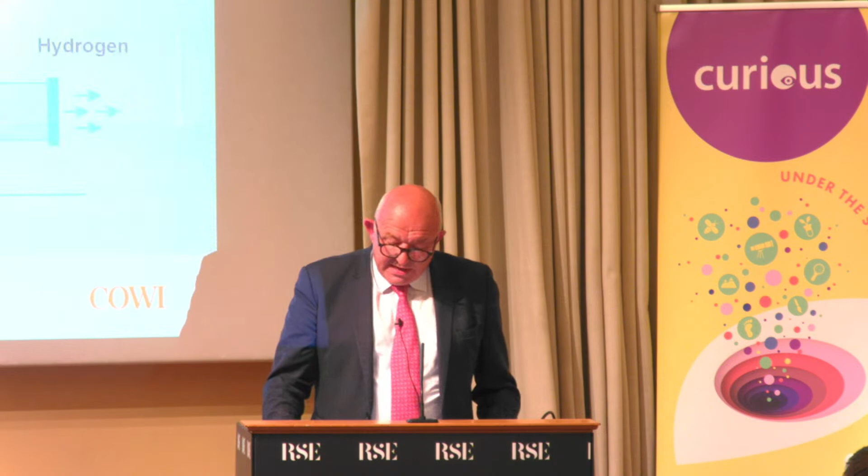There are many technologies at play here, and I'm just going to concentrate on a couple that our business is involved in — I'm not going to cover the whole gamut. The time is right to tap into hydrogen's potential to play a key role in energy storage. This technology is emerging as one of the leading options for storing energy from renewables.

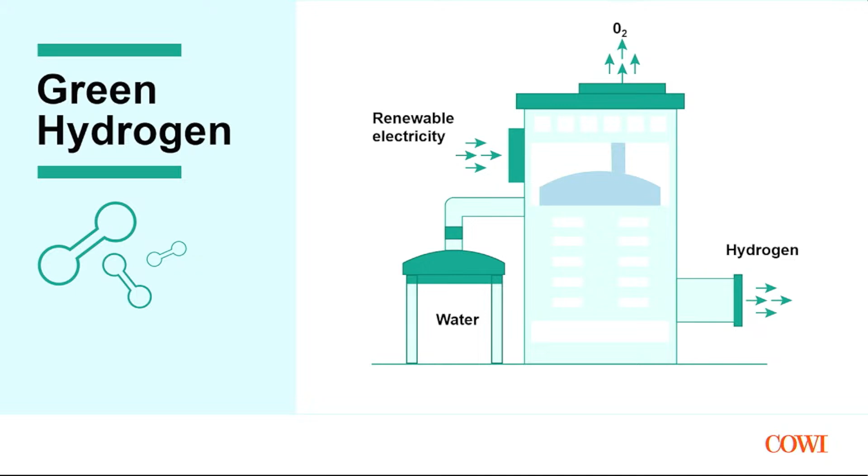The main issue for me is that we're quite quickly falling behind our neighbours, particularly Denmark and Germany. Green hydrogen is made by electrolysing water, splitting the water molecule into oxygen and hydrogen, critically using renewable energy. That's green hydrogen, as opposed to blue hydrogen, which is derived from methane with associated carbon capture. You'll hear much talk in the UK about low carbon hydrogen.

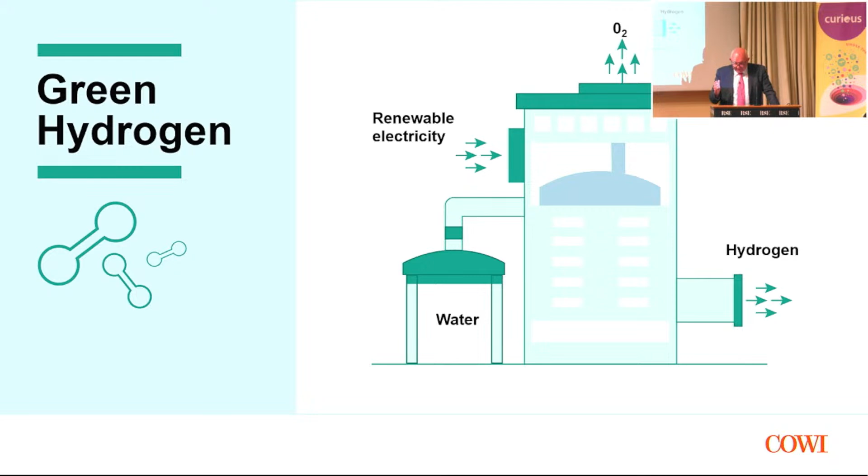That is hydrogen, green hydrogen and blue hydrogen. But blue hydrogen is not pure renewable sourced. Hydrogen production aspirations in Scotland published by the government are to reach 5 gigawatts capacity by 2030, a substantial amount, increasing to 25 gigawatts by 2045. And this is not just green, it's green and blue. So when you hear these numbers, remember to challenge them. The aspiration of the Scottish Government is to become a net exporter of green hydrogen, actually the electrolyzed hydrogen.

Scotland is in a great position to develop and exploit the potential for green hydrogen. We've got plentiful wind opportunities. We've got plentiful fresh water, because lots of countries where they're talking about green hydrogen, North Africa etc., they are limited by the availability of fresh water, where we're over-endowed with the stuff.

The RSE's position on the consultation with the Scottish Government was that both governments should focus on green hydrogen, but accept that blue hydrogen, in terms of we've got a lot of natural gas, should be considered as a bridge to a green hydrogen future. And that's really given us time to get the electrolysis scaled up to the size that we would want it. So green hydrogen has a role in mitigating the curtailment costs that I talked about, but its real benefit is much wider.

In fact, it featured in a number of the main initiatives that came out of COP26 in Glasgow. Green hydrogen-based fuels such as ammonia, green methanol and green ethanol store renewable energy and allow us to use that energy at a later point in time. It can be transported over long distances from regions of abundant energy like Scotland to energy-hungry areas, perhaps thousands of kilometres away. So it's a very versatile fuel.

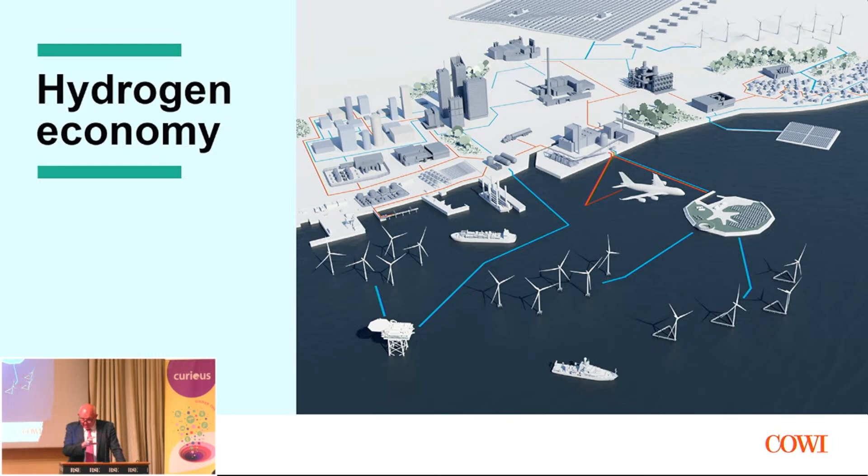The potential interconnectivity of a hydrogen economy is shown on this cartoon, with renewable energy sourced from wind connected to various off-takers through electrolysis into society. The process of reaching a hydrogen economy will be achieved to a large part by a process called sector coupling. And this sector coupling attaches and attracts energy producers to energy users in terms of hubs, and that is using hydrogen locally.

In effect, these sectors are coupled via green hydrogen and green fuels. And by coupling these different sectors of the economy, we have the opportunity to start looking at decarbonising hard-to-abate areas in society, and that is things like shipping, heating, heavy transportation.

As an example of just the rate of change in this space and the investment that is now being poured into it, just what is being achieved and maybe how far Scotland is behind. The port of Esbjerg in Denmark is its largest port, annual cargo of 4.3 million tonnes, 6,000 ships, so it's a substantial port. There was a meeting there with the President of the European Commission, the Chancellor of Germany, and Prime Ministers of Belgium, Denmark, Holland. They all signed a joint declaration to look collectively at what energy could be produced from wind around their coastlines and feed it through the port of Esbjerg, focusing that as a hub. So they pledged to expand the renewable energy there by some tenfold in terms of offshore wind.

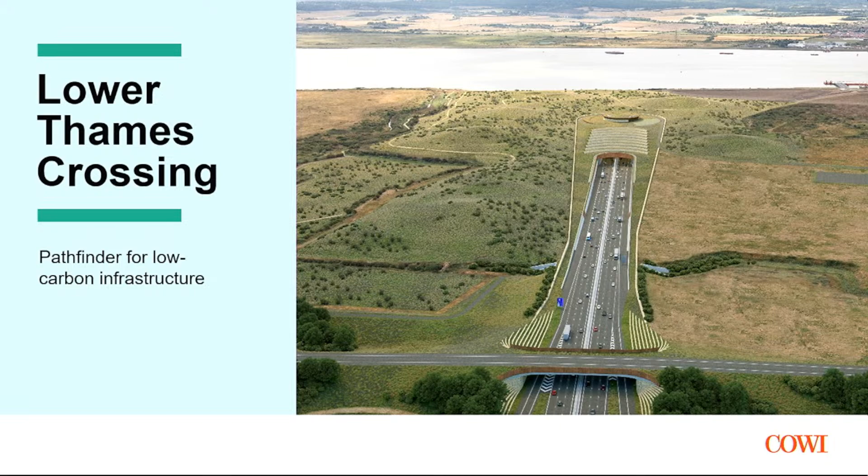Another area closer to home, a project that's very close to my heart, is the Lower Thames Crossing. It's new highway construction in the Thames. The civil engineering sector is very hard to abate, to try and get the carbon out, but energy storage can help. LTC is a brand new road hoped to connect Essex and Kent underneath the Thames estuary, hoped to be completed by 2029. It will have the UK's longest road tunnels, using the third largest tunnel boring machines in the world, the largest we've ever had in the UK, 2.6 miles of tunnel, 14 miles of road, 50 bridges. So lots of concrete, lots of digging, lots of carbon.

But what National Highways have done here is quite unique. They benchmarked the amount of carbon that was going to be produced from this project, and they are actively going through the procurement process now, and will incentivise the contracting entities who come to build it with real money to drive the carbon down. So they are creating a market now, in terms of green fuel development along the Thames estuary, to decarbonise this piece of infrastructure. This is a real pathfinder project within the UK, and I certainly think that in Scotland we should be looking at this sort of approach to decarbonise our infrastructure. Some real lessons to be learned.

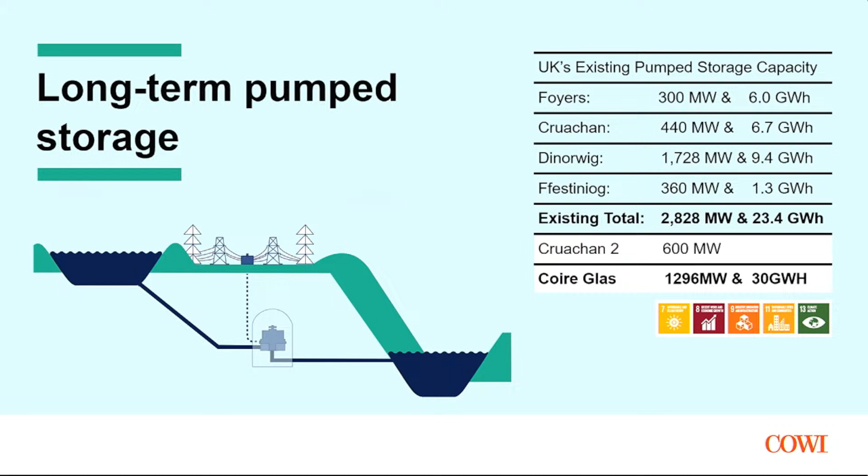The draft strategy acknowledges the potential for hydroelectric pump storage, long-term pump storage, to play a significantly greater role in our transition, providing flexible security and resilience to our energy systems. It's a very efficient system, and it's proven.

So how does pump storage work? There are two bodies of water. In times of low energy demand, when we have a surplus of energy or energy prices are low, you pump water up to an upper reservoir. In times when we need energy, the water goes through turbines, creating hydroelectricity, which is fed back into the grid. So in effect, it's a large battery, a highly efficient way of storing electricity.

There are two schemes in Scotland progressing at real pace. There's Scottish and Southern Energy's Coire Glas pumped storage hydro project, which is set to double the UK's storage capacity when it opens, and it's progressing well through its development. You're probably also aware of the Cruachan power station on the west coast. Well, Drax, the owner of Cruachan, is moving at pace with Cruachan 2, another pump storage scheme beside Cruachan 1. So there's a big movement for pump storage in Scotland.

This is tempered by policymakers, and this is the UK government, who have been put under pressure, quite rightly so, because the people who want to release this investment and spend on these schemes are not through the final investment decision yet. It's all about the price that they can charge for storing electricity. So they're looking for a cap and a floor, a ceiling and a floor price on the energy that they can store for us and for society. I know the First Minister has written to the Prime Minister to urge him to come out with what these values are.

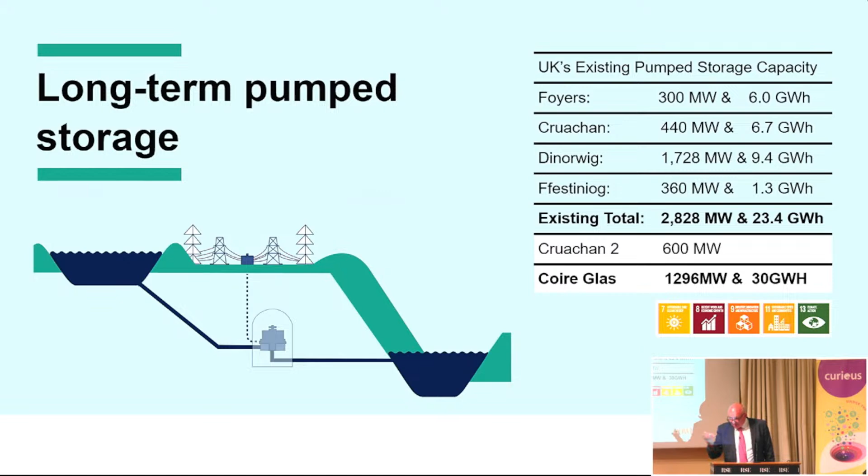Scotland has a very long history in hydroelectric power. As you drive around our country, you cannot fail to see the dramatic infrastructure that snakes around our glens, the power stations and the dams. The starting point for this development was after the First World War, which we won, but it was almost a Pyrrhic victory because Britain was in such a desperate state, it took a huge toll on the country. Lloyd George's government recognised that Britain's electricity system was backward.

It lagged way behind the US and Germany, where the production of electricity per head far exceeded that of Britain. The government then recognised that the transformation required to improve the economy, to improve jobs and the life of our countrymen really needed to increase electricity production. So engineering and scientific adjustment had to be made and made quickly, and it was essential for survival.

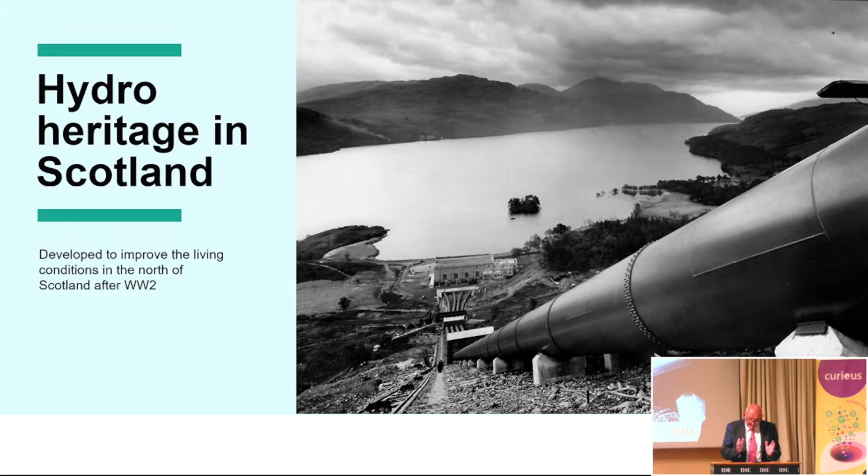This led, in fairly short order, to the development of the national grid, and by the time the Second World War came along, we had an operable national grid, and that became a vital part of the defence in World War II. But as we trundled through World War II, in 1942, Churchill set up a Council of State for Scotland.

This comprised the living Secretaries of State for Scotland, and charged them with considering the future of Scotland and rebuilding Scotland after the war. He said he would look favourably if any unanimous recommendation was made from these Secretaries of State.

In very short order, the committee established a subcommittee to look at the potential for hydroelectric development in Scotland, particularly the north, and they reported back very favourably. In 1943, the Hydroelectric Development Scotland Act led to the establishment of the North of Scotland Hydro-Electric Board, and that is the precursor to SSE today.

That was formed in August 1943, so they're celebrating 80 years of the Hydro Board last month. And if you go to the Scottish Storytelling Centre in Edinburgh, there's a wonderful display that opened today, all about the original paintings. It's well worth going.

So the scale of the investment - SSE's fleet of stuff built in just shortly after World War II: 78 power stations, 8,700 kilometres squared of catchment. That's 11% of Scotland feeds into hydro, and 1,150 megawatts of capacity.

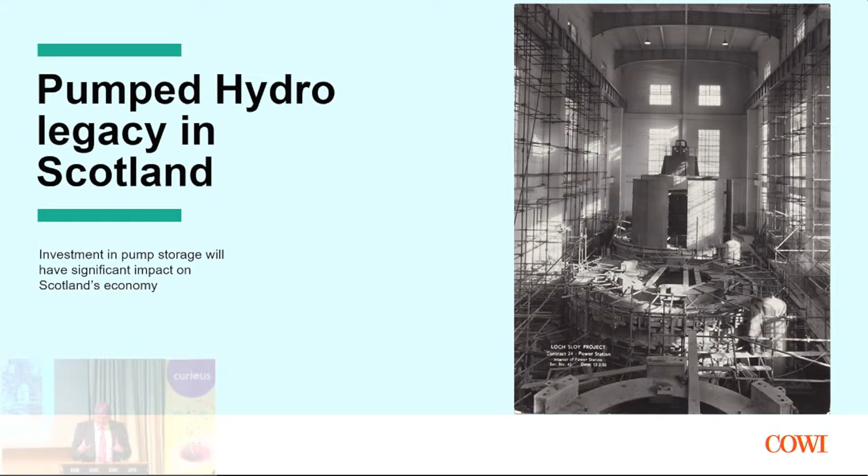And if I go back to my discussion on hydrogen, the potential for jobs in the green hydrogen area in Scotland - lots of those skills are linked to our skills in Aberdeen and the coastline there in terms of oil and gas. So saving those jobs, creating new jobs, coupled with pump storage development, the potential impact is significant indeed. In fact, I would go as far as to say truly transformational.

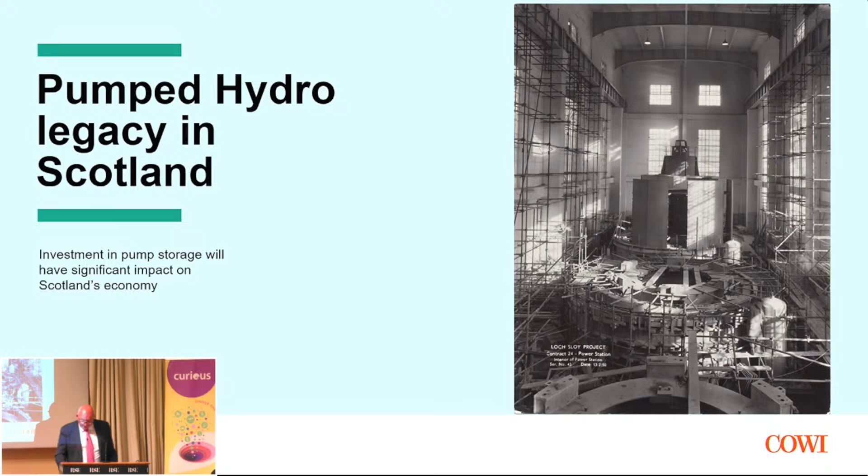Why this site? Well, there are two large bodies of water. There's Loch Lochy, and Loch Ness at the back. I'll show you Loch Lochy in a minute. There's a huge volume of water, and the ability to create a reservoir high on the hill with not a very long planned distance between the new reservoir and Loch Lochy.

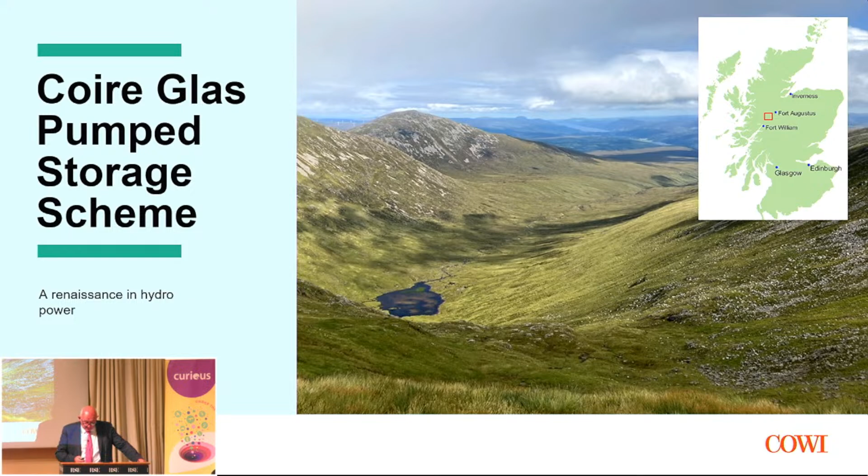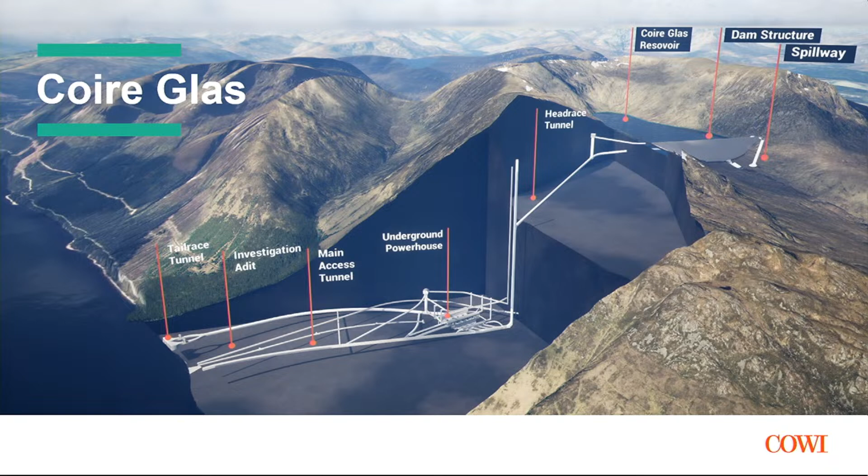That's in generation mode. When reversed, when you're pumping water to get up there, it comes in from the intake structure through the turbines, reversible pumps, up here and back up to fill this loch. The other bits and pieces of tunnel are an emergency access tunnel, ventilation tunnels, a ventilation shaft here - that's an extension - and that's a surge shaft.

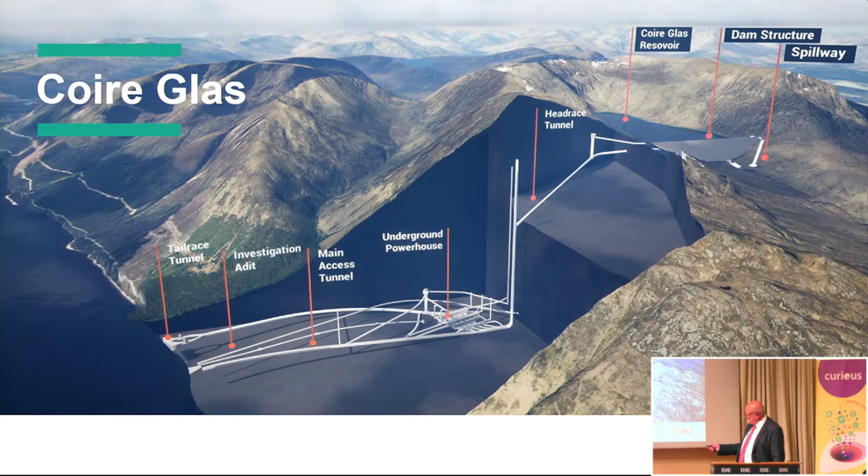So the scale of the underground development is monumental. To give you an idea, from there to there, it's a vertical head drop of 500 metres. The height of that shaft is akin to the Burj Khalifa tower in Dubai, the pointy tower. So the scale of the underground development is eye-watering - 2 kilometres of vertical shafts, 67 underground openings, all tied up will be 18 kilometres in length, and 4.6 million tonnes of rock will be excavated.

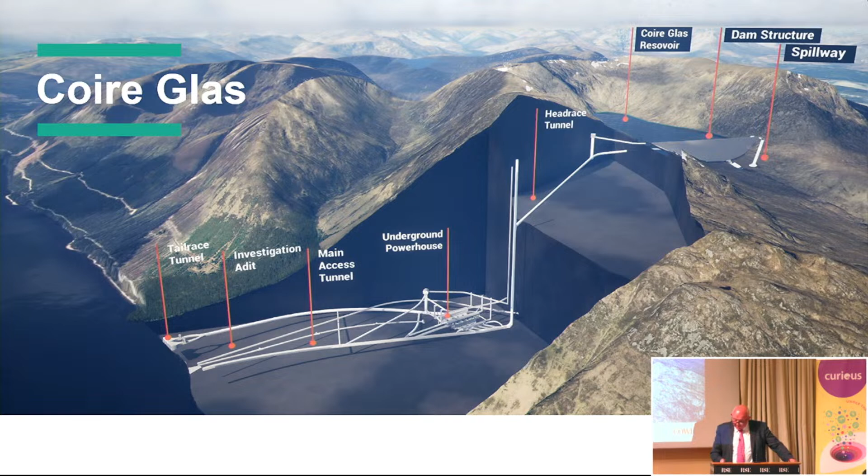So, truly gigantic undertaking. This is a closer look at the power station. Incidentally, this is not necessarily exactly what would be built - this is an early stage development. This is the bottom of the pressure shaft, you can see it's blue. The water comes down here or up there, goes through the power station complex and makes its way out through the tailrace. The caverns here are large enough to hold Glasgow Cathedral, and these tunnels around the top are for ventilation. This little hammerhead blind tunnel here is an exploration adit that is currently being constructed.

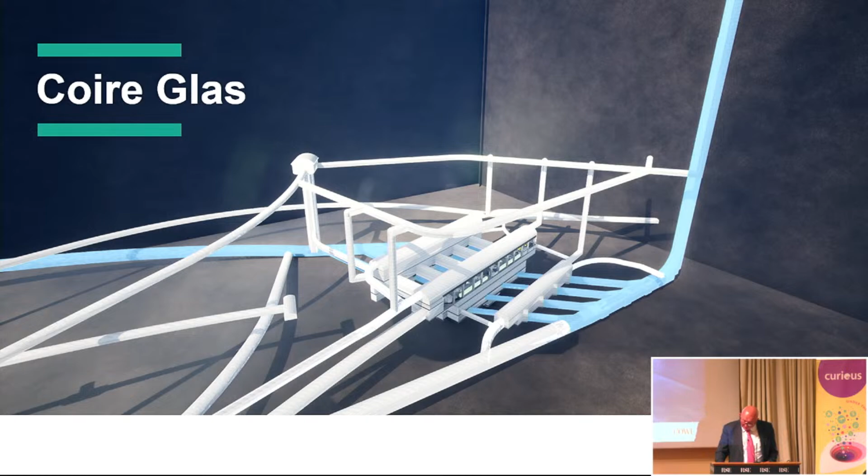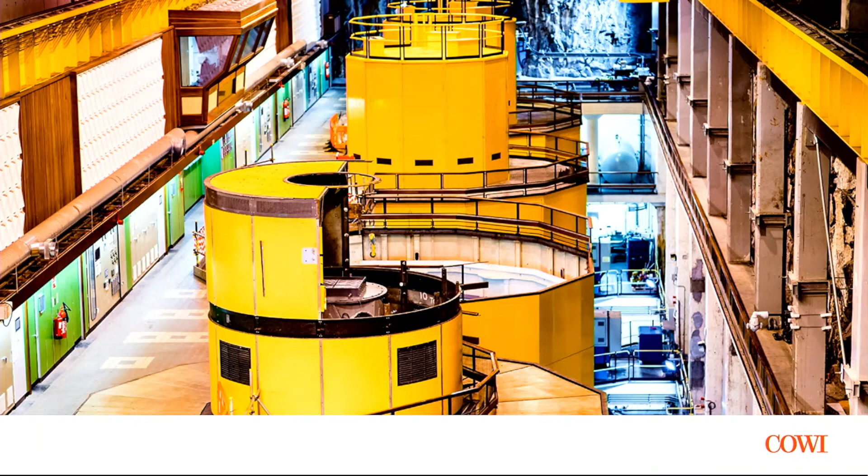So this is from Cruachan, just to give you an idea of what it looks like inside the power station. This is the turbine hall. You may have been to Cruachan - it's a big tourist attraction - just to show you the scale of the development that's coming.

And how do we build these things? Well, all of them will be built by a method called drill and blast. This is a high-speed railway, but it's the same technique that will be used. That's a drilling jumbo presented to the tunnel face. We drill holes in the tunnel face, charge them with explosives, fire the explosives, and go through a mining cycle of excavating the material and taking it to the surface.

As I said, there's 67 tunnels to be built at Coire Glas, and all of that waste rock will be used around the site - some in the dam and some in other parts of the site. As for the geology, the tunnel walls will be supported by sprayed concrete, and everything on the wet side, where there's water, there'll be a concrete lining.

In the cavern construction, the caverns are immense, so we take them out in slices. We go in at the top and take the top of the cavern out in 2 or 3 slices - small tunnels to form the cavern - and then we work down the sides of the whole cavern until we create the full opening. So it's a very sequential process. We just go in every day and do the same thing, getting faster and faster at it.

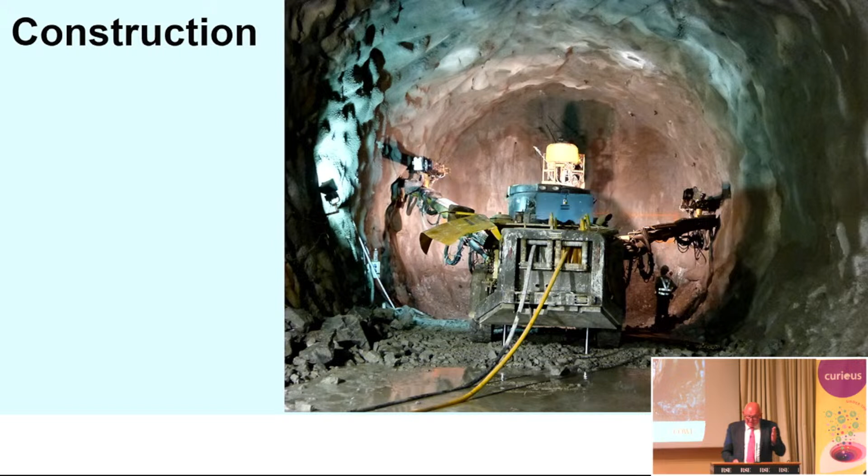So the skills and techniques for the development of these tunnels are here in Scotland. We have the talent, we have the people and resources to work on these tunnel projects.

So, this is what it will look like when it's complete. We've got a dam at the top, tucked away so it can't be seen from Loch Lochy, which is down here on the side. We've got the intake structure on the bottom. The difference between pump storage and conventional hydro is we've got two bodies of water - we don't have to dam rivers. So it's, in essence, a much lower environmental footprint than conventional hydro.

So, a quick look at Cruachan. There's an existing dam - if any of you hill walkers have walked up to Ben Cruachan, you'll have seen it. It was opened in 1965. That's the existing station, and those are the yellow turbines that I showed you.

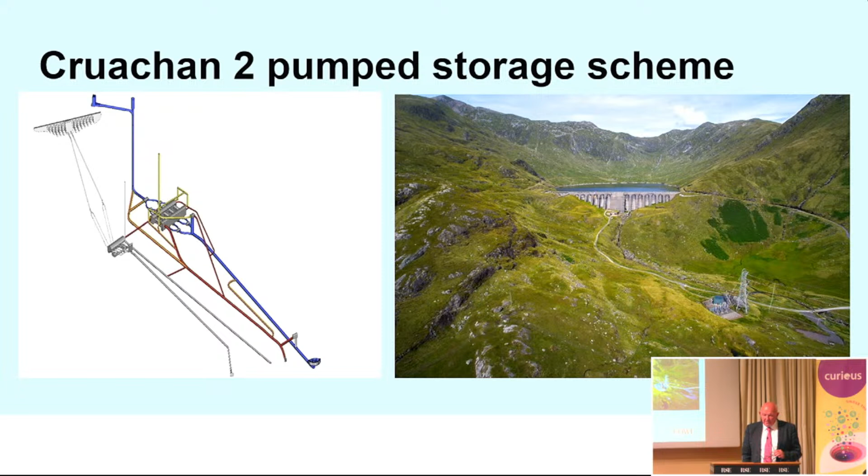Now this is Cruachan 2, and you can see Cruachan 1 is about to get an enormous brother or sister - huge caverns. Interestingly, it will tap into the same reservoir, and it's all about getting power quicker into the grid. Drax are pressing ahead with procurement. They're actively out on the hill drilling holes, taking samples, and starting to think about how they might procure it. They've got consent, planning permission, and a grid connection, so they're good to go and pushing ahead at a fair pace.

So going back to Coire Glas, the location is on the Great Glen Fault. The Great Glen Fault runs on land from Fort William up to Inverness and on into the sea.

So this is a slice through the area of the hydro scheme. Loch Lochy is here, and there's a fault - the rock in the fault zone is quite highly tectonized, broken up by the forces active as this huge crustal plate moved in the past. It's not active anymore. Up here you can see the top reservoir and Loch Lochy.

These rocks are psammite rocks - they used to be metamorphic sandstones with some siltstones. They've been highly tectonized, squeezed and heated up, so they're a dense, hard, durable, strong rock formation, highly folded.

What we have to do is build the hydro scheme in here, so we need to characterize that rock. We need to understand all the nuances within the rock, or at least interpret those, so that the hydro scheme can be constructed in a safe manner.

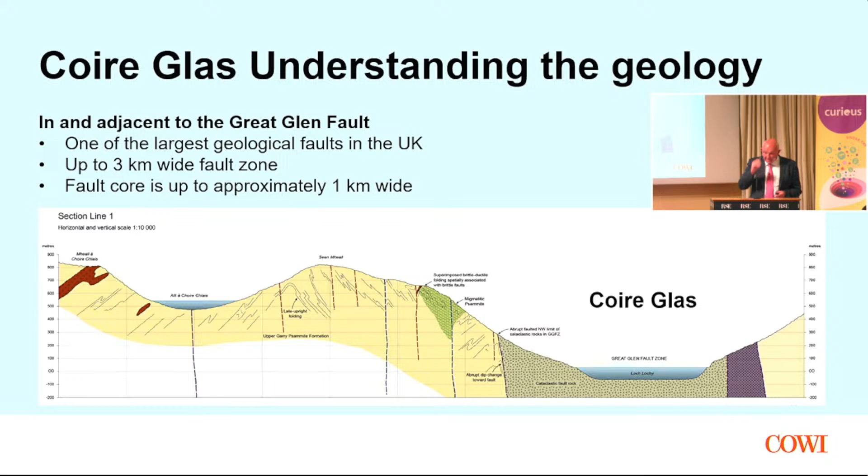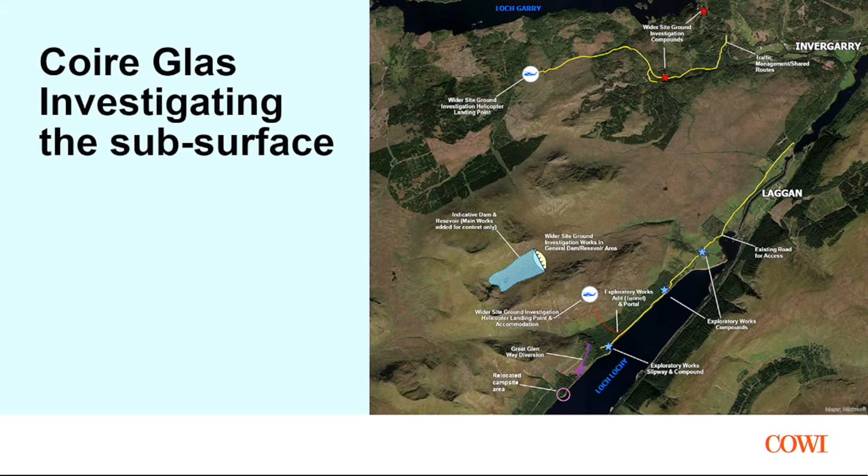So there's 2 contracts. One is with compounds here, and this is for an exploratory tunnel that is being built into the mountain. The reason we're building a tunnel now is to really have a look at the rock conditions in the area where we're going to be building.

The second is up here, and this is a site investigation contract where we're drilling holes and taking cores to study the rock and get a better understanding of the whole picture, because we've got to piece all the knowledge together before the contractor goes into design and construction.

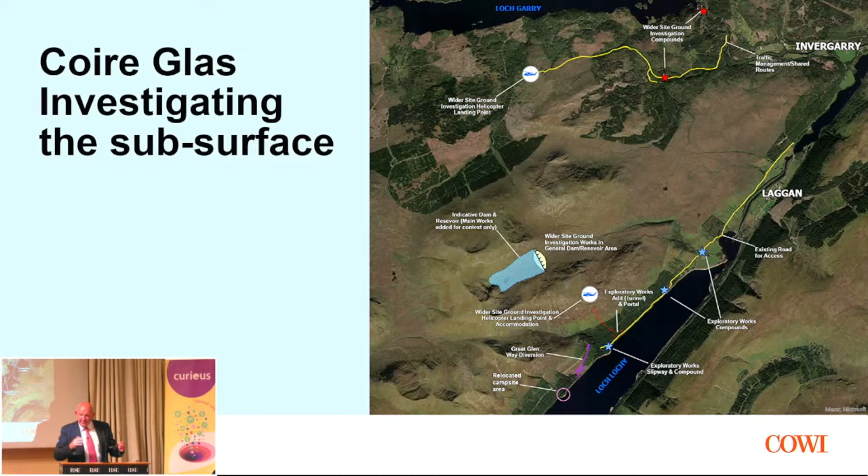You can see there's a couple of helicopter landings there, and we've got neighbours along the road here. Because it's such a big construction site, there's a lot of interaction with SSE's neighbours, so a lot of care is taken in that interaction.

And what we do then is take out rock cores - continuous rock cores. So from this borehole, there's half a kilometre of core.

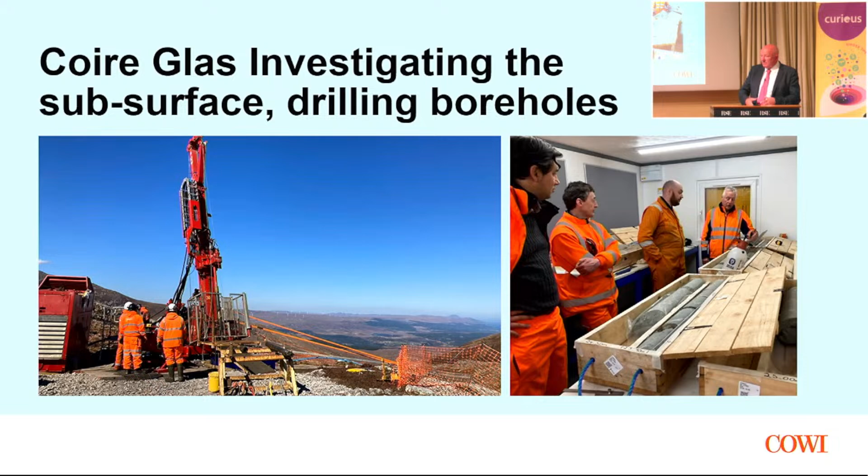The cores are described in very great detail - not just looking at the rock type, but the fractures in the rock and their orientation. We look at the borehole wall, because we've got half a kilometre of cylindrical hole in the ground. We do tests down these holes to look at the fracture frequency, and we look at the stiffness of the rock in terms of its mechanical properties.

All of this is fed into a process so we can do two things: design the power station safely so the rock support is fit for purpose, and manage risk during the contract. Starting to mine deep under a mountain without knowing anything about it, placing contracts to build huge caverns, carries a lot of risk. The more we know about rock mass conditions at depth, the better we can design and mitigate risk during construction.

So a huge effort goes into the boreholes, and lots of these samples are taken away. We do a lot of laboratory testing on them, looking at the mechanical properties. We're treating the rock as an engineering material, and that's really what all this investigation is about.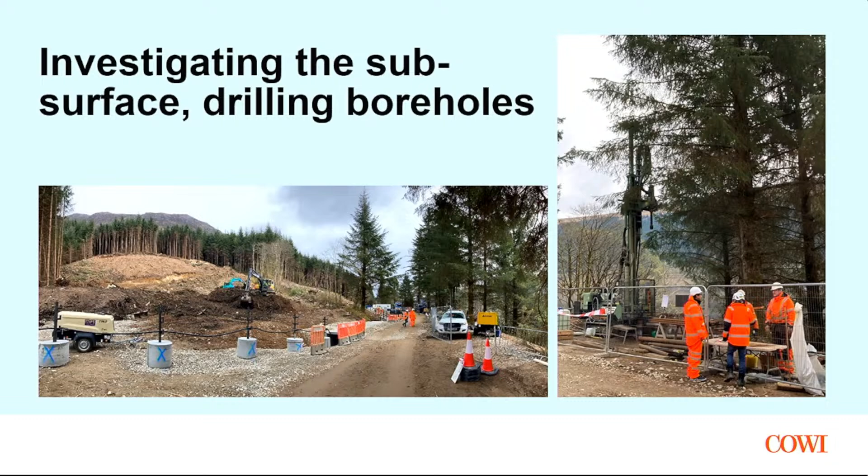Not only are we drilling at the surface at the top of the mountain, but also at all the low-level surface outtakes and intakes, we have to characterize the ground. There's a huge investigation underway just to help us understand the geology. At the end, we're not really interested in the rock type, whether it's a psammite or a granite or whatever. What we're interested in is the mechanical properties of the rock as an engineering material.

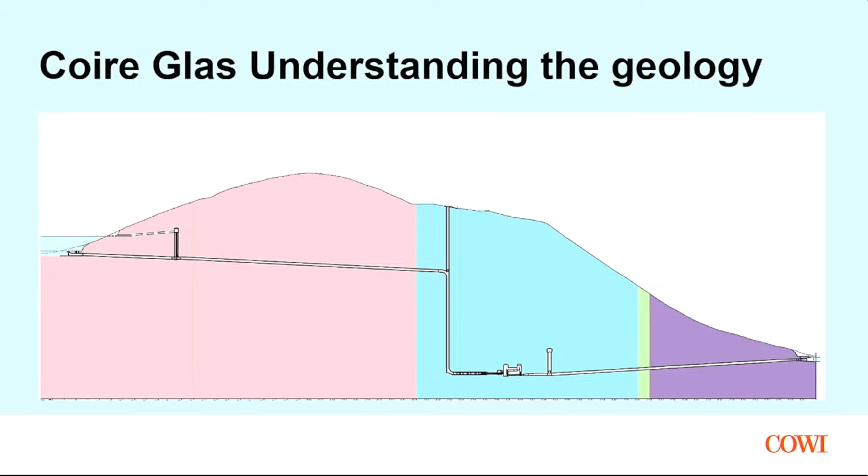So this is the same cross-section, more in engineering terms, and the different colours are all psammitic rocks apart from this, which is the impact of the Great Glen. We're sectioning up the whole mountain, looking at how the different geomechanical properties in different parts of the underground space align with different types of support or construction methodologies. That's the process going on at present.

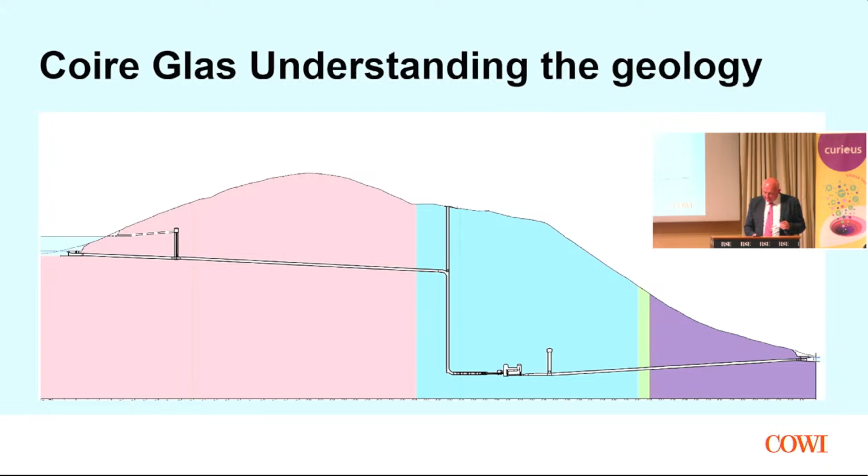A big part of this, and quite an exceptional, brave piece with big investment from SSE, was to actually start building a tunnel down into where we will be excavating these large caverns. This is the site on the shores of Loch Lochy.

You can see the big site establishment, clearance in the forest, and the tunnel portal there with machinery. They cleared all the forest and excavated a portal area to start commencing tunnelling.

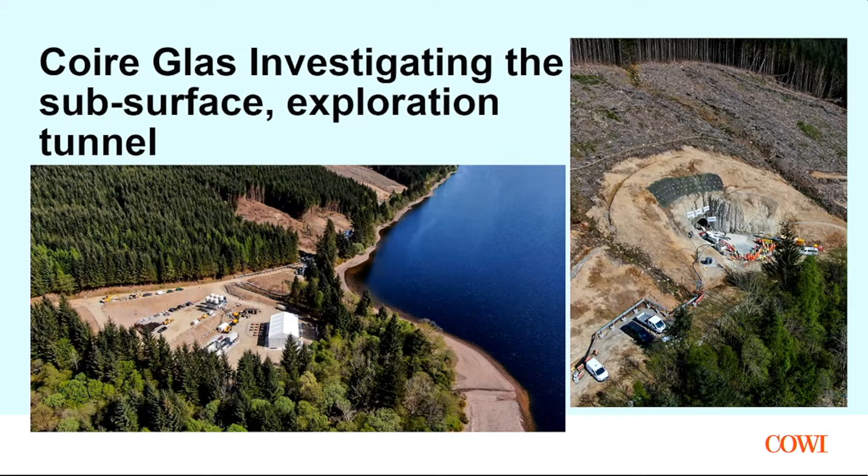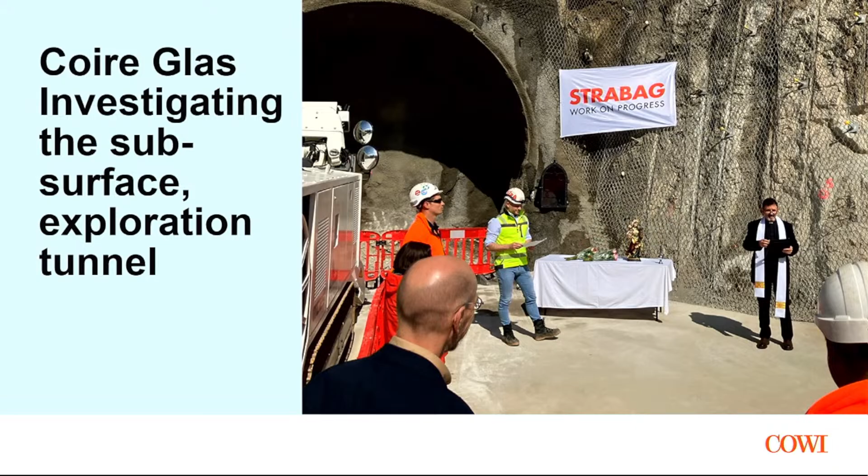Now, tunnellers are a fairly superstitious lot, so the patron saint of tunnelling is St. Barbara. At the start of any tunnelling escapade, there's a blessing by a priest. There's Santa Barbara there, and a big blessing ceremony before everyone piles in underground, because in reality it's not as dangerous as it used to be, but it's a historical aspect we keep going within tunnelling. So you'll always see a little Santa Barbara in the sidewall of the tunnel during construction.

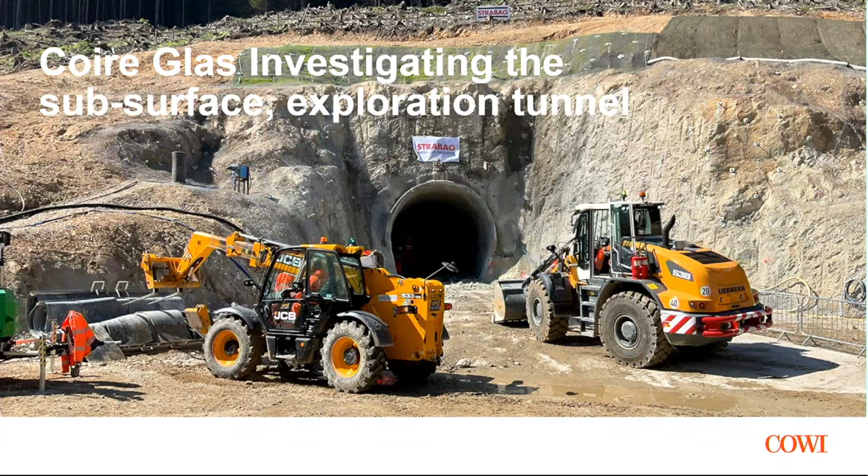So this is the portal of the tunnel being constructed at the moment. This morning, the tunnel length was 347.7 metres long. As we sit here now, they're preparing for another blast tonight, which will take it another 4 metres, so it'll be 4 metres longer by tomorrow morning. It's a huge investment, and the data we collect while going down this tunnel is fed into the overall interpretation of the underground space.

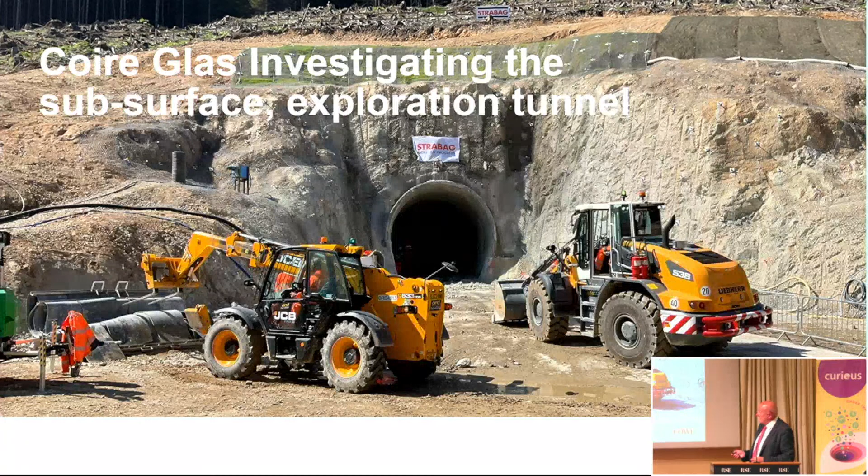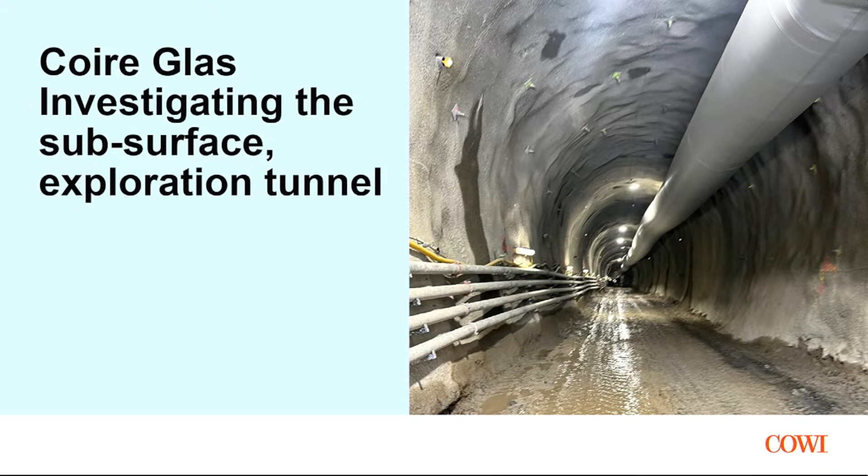We're looking at and collecting geomechanical and geological information. That's all fed back into a database and interpretation that feeds through to design, through to construction, and through to the contract administration when the power station is built. And that's what it looks like: ventilation and services, air and water pinned to the side, sprayed concrete, and the things sticking out of the sprayed concrete are rock bolts to hold this open. I can't think of another hydro project where the owner has spent this amount of money investigating the ground to feed back into that process.

Do we have the opportunity to become an energy superpower? I think undoubtedly the answer is yes. We've got the people, you saw them there. In terms of natural resources, we are over-endowed with the ability to create electricity from onshore and offshore, particularly offshore. ScotWind is looking at 17 sites about to come on stream, and the Scottish Government and the UK Government have ambitious plans with that.

It's pointless making all that wind unless we seriously do something about the wind energy, and not all pay for it not to be generated. So there needs to be storage. There needs to be a big focus on renewable energy storage.